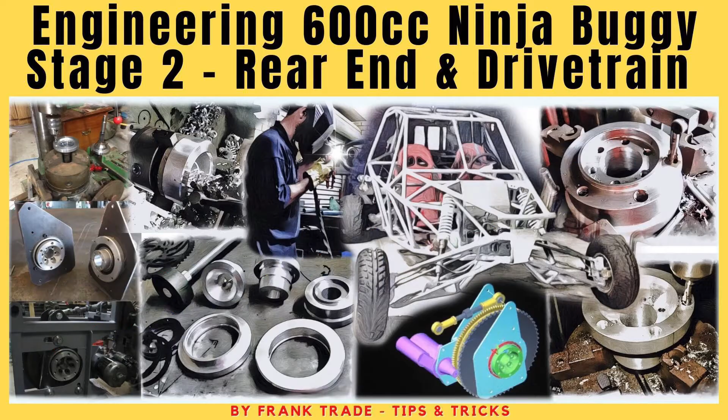Welcome to the series From CAD to Fab, Stage 2, Rear End and Drivetrain. Continuation from Stage 1, the first video.

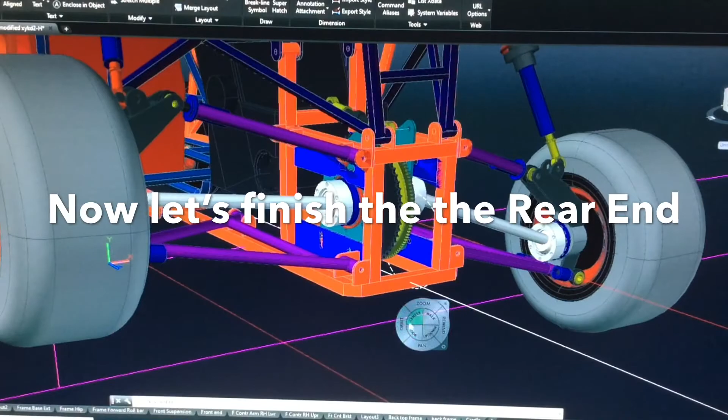The CAD Solids model here shows the left rear suspension in full compression and the right side in rebound. Now, let's finish the rear end. Let's go from here.

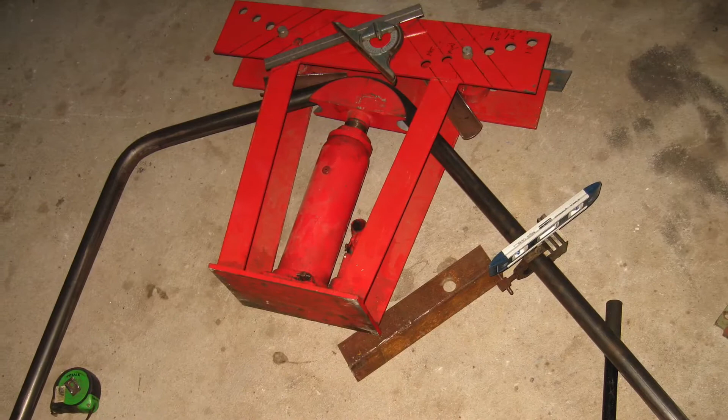The tail frame fabrication. Bending the upper hip of the tail frame. Time to mark and notch the contour of the pipe to fit snug. Upper hip of the tail frame welded on.

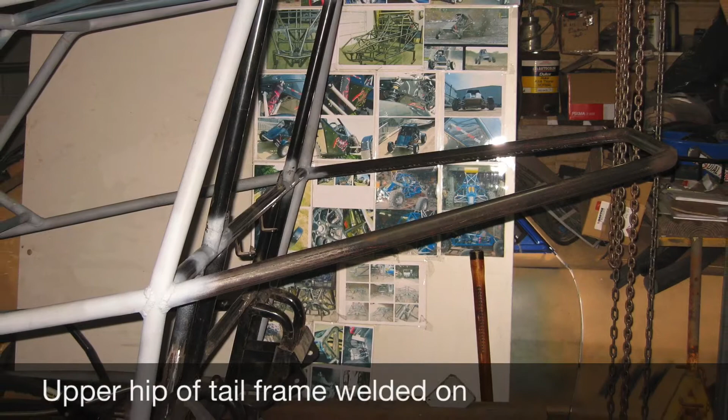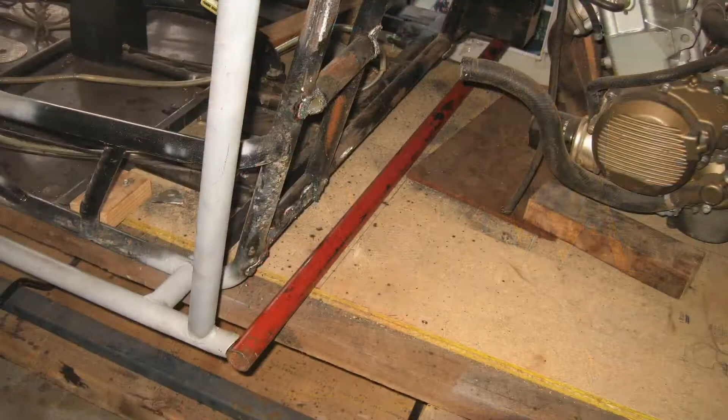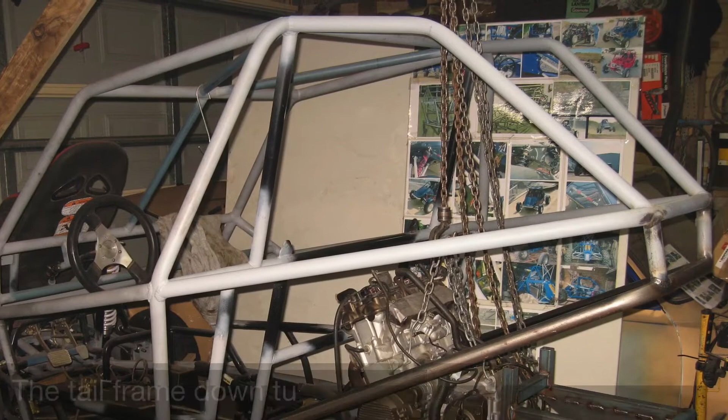Here I'm pointing to the old control arm mounts to be cut off. Now, the old control arm mounts are removed. Extending the base frame. The lower tail frame hip added. The tail frame down tubes are also added.

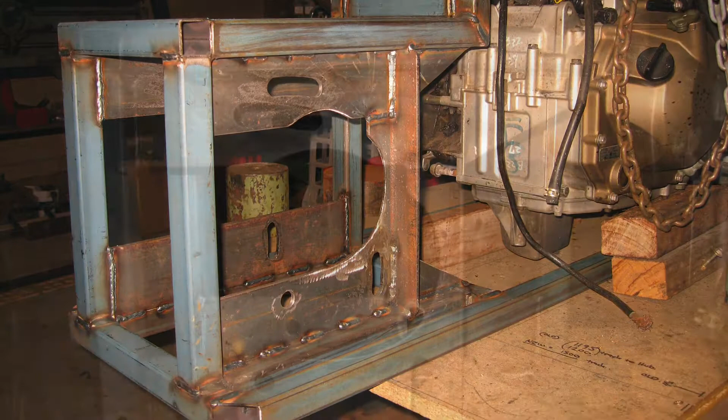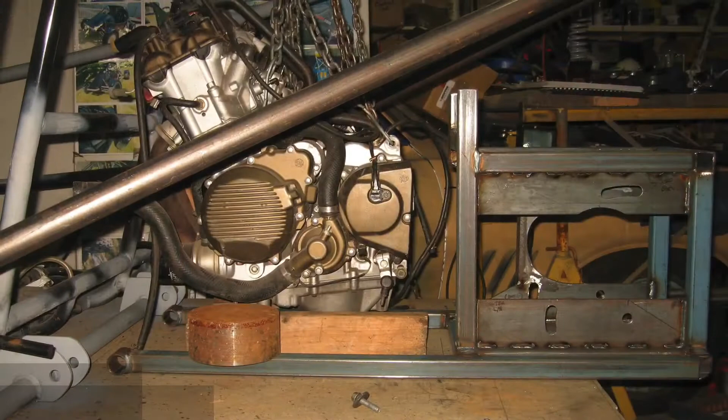The centre drive housing is fabricated. Right side of the centre drive housing, back of the centre drive housing, left side of the centre drive housing. The centre drive housing is in the correct position. Housing and frame now attached to the chassis.

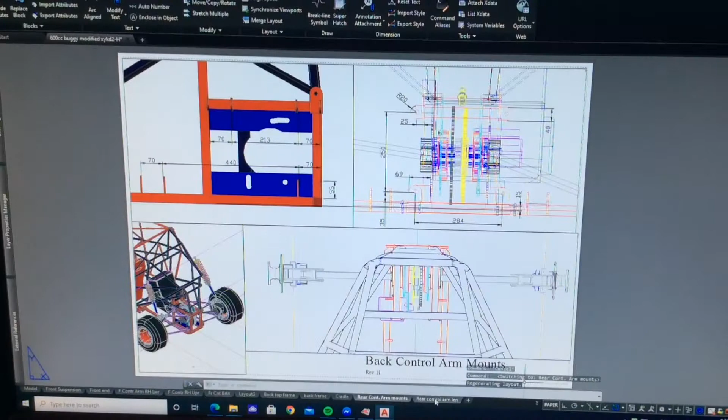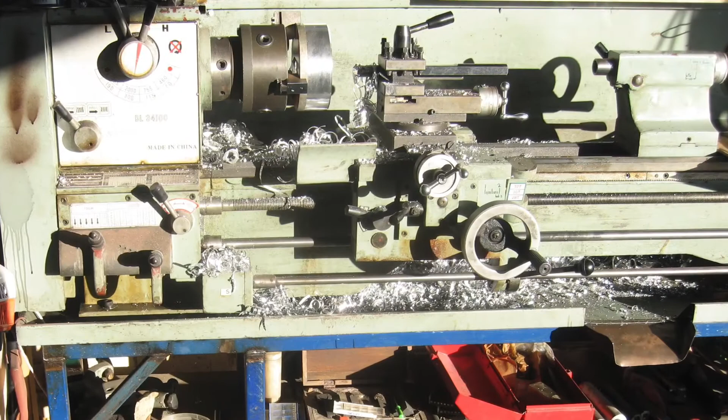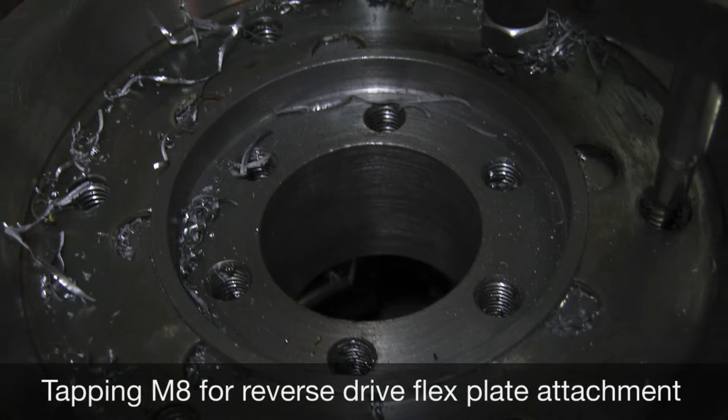Here the centre drive hub has been machined in the lathe and I'm checking that the sprocket fits. Tapping M10 by 1.5 for the drive sprocket attachment. Tapping M8 for the reverse drive flex plate attachment.

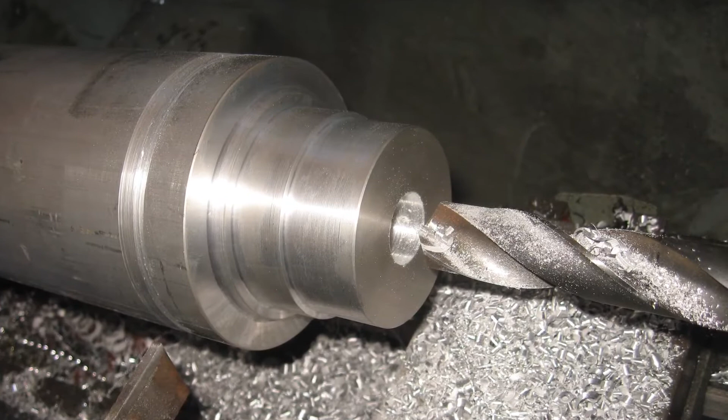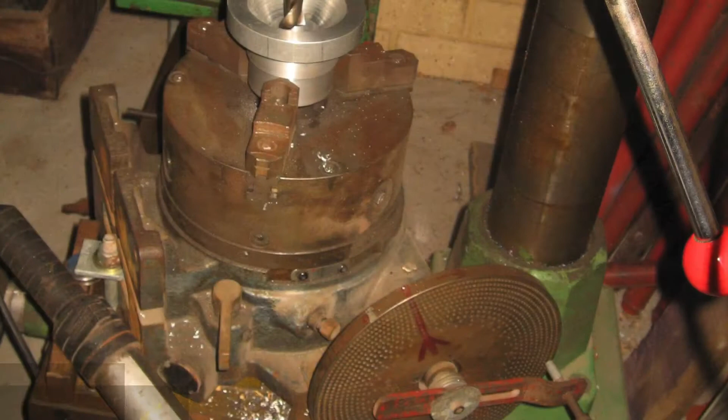Machining the CV drive hubs with the indexing head on the mill drill. These are the Porsche 930 CVs to be used.

115 by 75 by 20 bearings will be fitted into these housings.

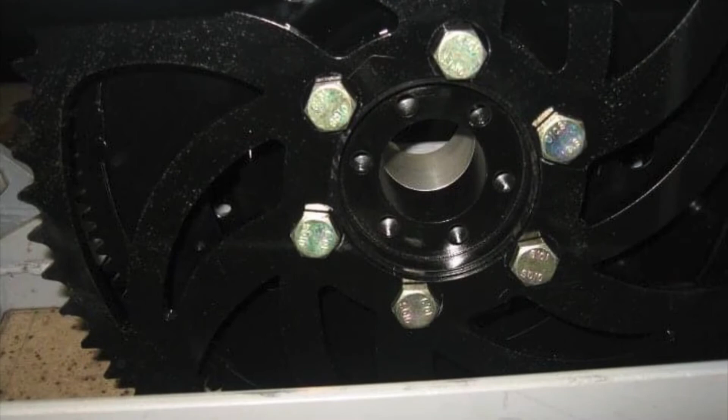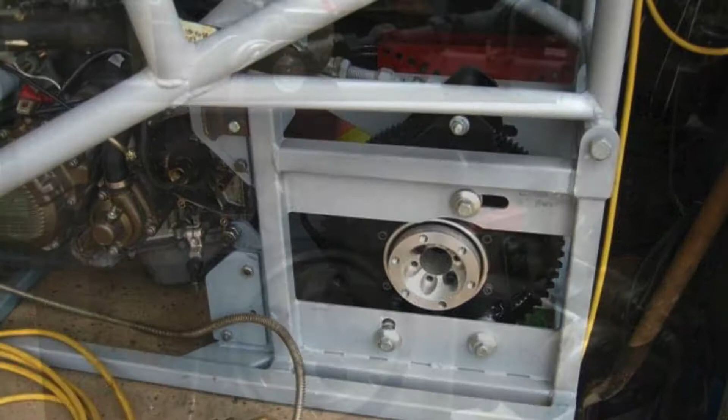The chain tension adjustment mechanism. A starter motor is used for an electric reverse.

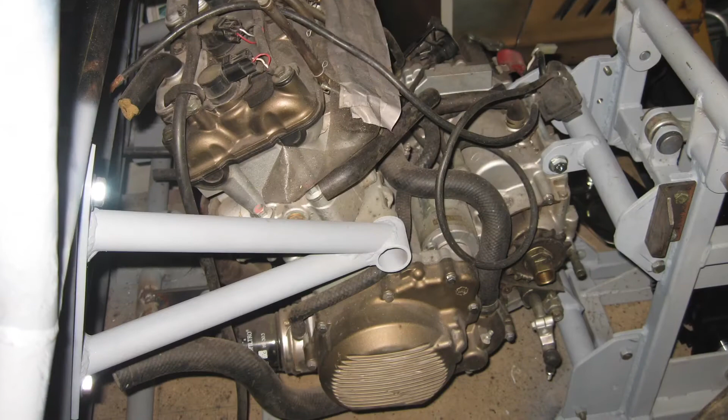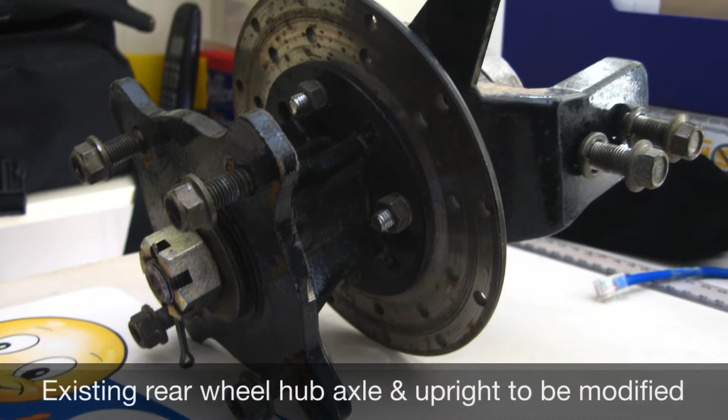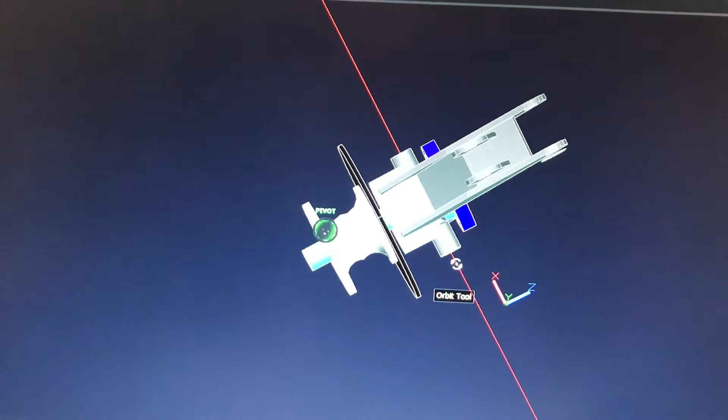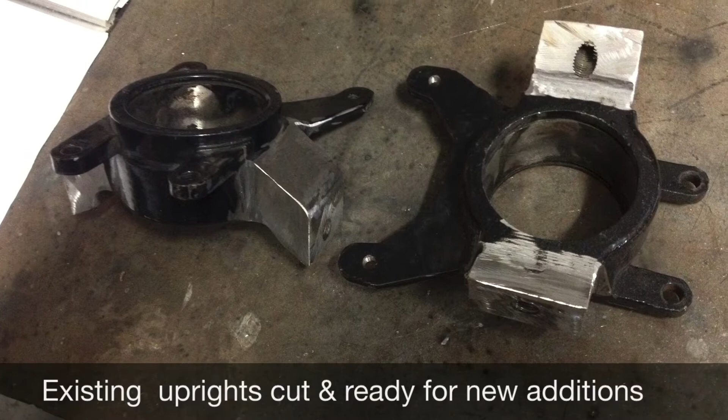Existing rear wheel hub axle and upright to be modified. The new CAD Solids model designed upright and axle wheel hub assembly. Existing uprights cut and ready for new additions.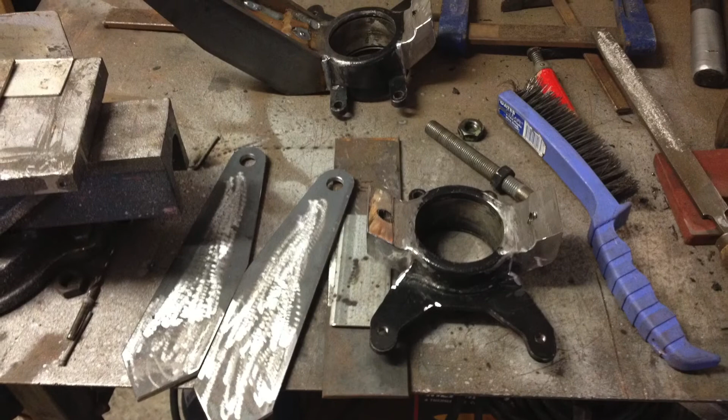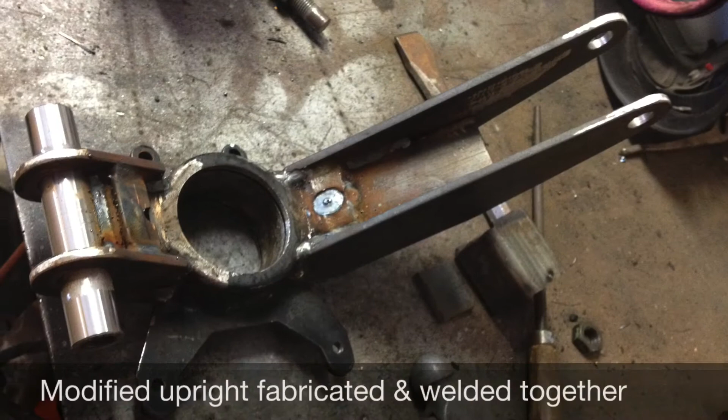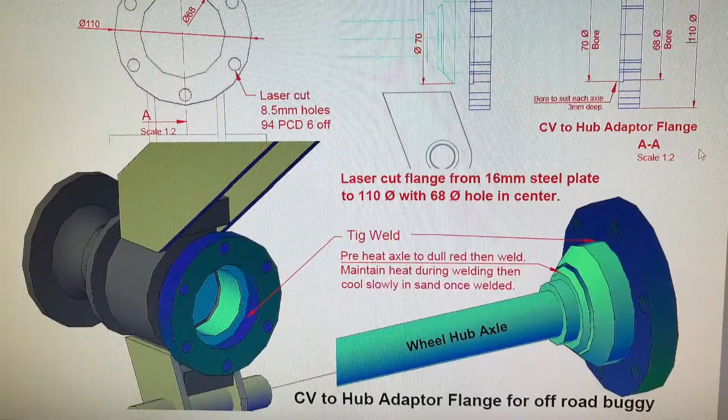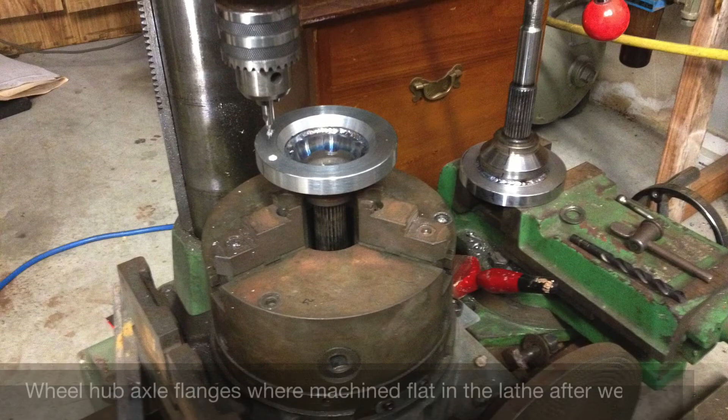Modified uprights fabricated and welded together. Wheel hub and axle CV adapter flange plate ready for TIG welding. Wheel hub axle flanges were machined flat in a lathe after welding and now are drilled and tapped M10 by 1.5 at 94mm PCD on the indexing head. These will have the Porsche 930 CVs bolted to them.

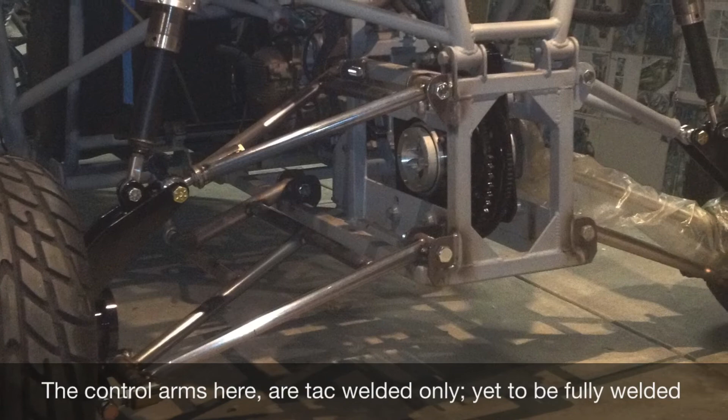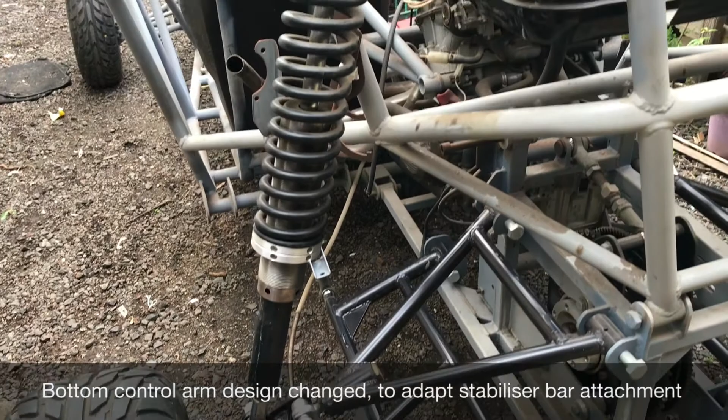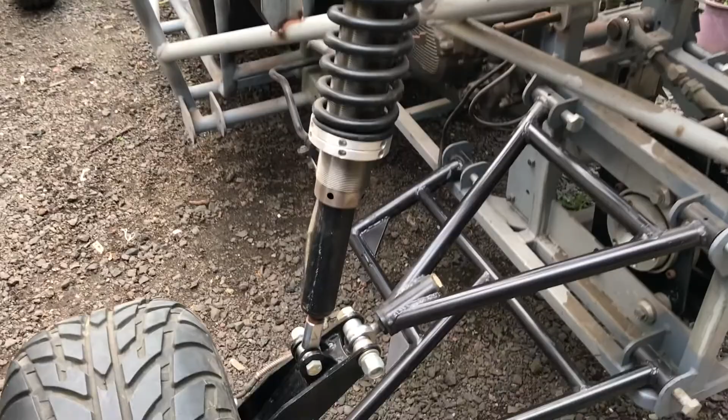The control arms here are tack welded only, yet to be fully welded. Bottom control arm design changed to adapt stabilizer bar attachment. Rear adjustable coilover shock mount. Stabilizer bar attachment assembly.